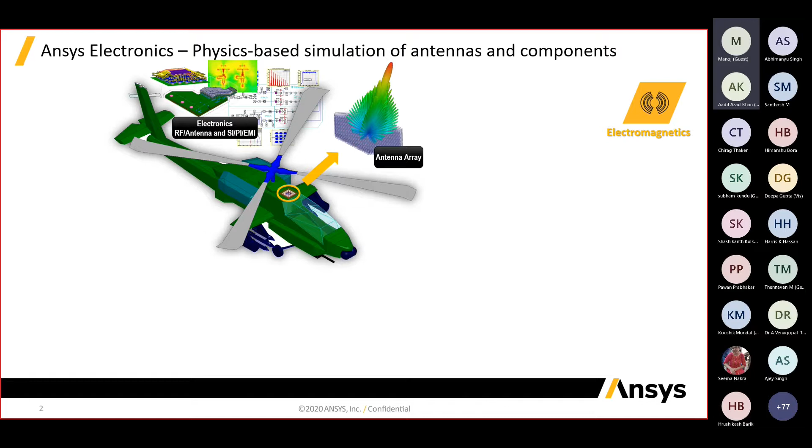Some people, especially for defense, need a high gain antenna. They use antenna arrays, multiple antennas, to get very high gain, so they can use it for long distance communication. Normally you will design this kind of antenna in a free space environment, but when you integrate this antenna on a mobile or laptop or any electronics gadget, because of nearby metals and other things, the shape is going to change.

Another application of electromagnetics is RF interference. That's called co-site analysis. What it means is, take your simple mobile, where Wi-Fi and Bluetooth are both working on the same frequency.

And very next to that, there is a GPS. Then next to that one, GSM bands are there, 5G bands are there. And these are all integrated within like a centimeter in space, and all are working in very nearby frequency bands. What can happen is when one is radiating, it can affect the performance of the other. So we need to analyze and see, if you have multiple RF systems on a device, whether it's going to work properly or not, right?

RF interference analysis. Another one, this is very interesting, is lightning. You might have seen so many videos where lightning is striking an aircraft and it is still flying without any problem. As per the calculation, every 4,000 flying hours, an aircraft can be hit by a lightning strike once. And that is very common, but they need to make sure that even though the lightning is happening, it should withstand it, right? If lightning happens and your entire engine shuts down, then all the passengers may die.

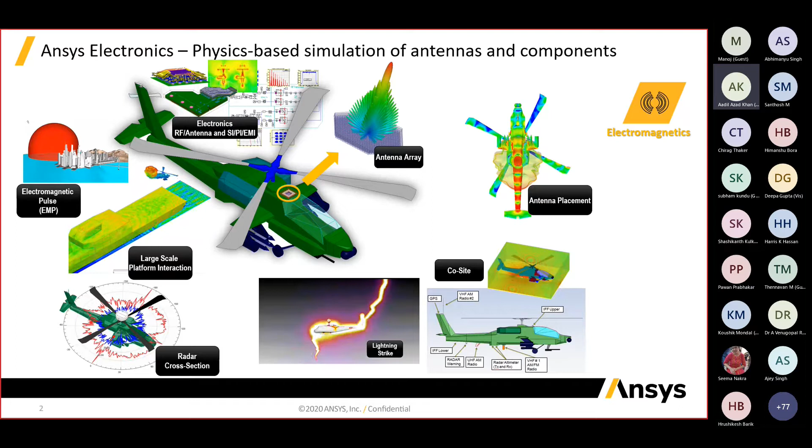So there are a lot of applications where electromagnetics are used, and where electromagnetic simulation software or computational methods can help you visualize or virtually model these scenarios and try to find solutions. Okay, so these are some of the applications where you can use computational methods. Coming to that, if somebody is asking, I want to do antenna simulations or communication simulations, the basic block will be the antenna, and this is a simple model.

As you do for any computational work, you will create a structure. These are all different antennas. You will excite each antenna with some excitation signal, you will set what frequency you want to simulate, and do a couple of material property assignments. That's what I need to do from a user point of view.

But we also need to understand how the electromagnetics are being solved behind the computational software. Without that, every electromagnetic solver, from my experience, is a black box. If you give good information, good input, it will give you good output. If you give garbage in, it will give you garbage out. So try to understand any simulation software you are using.

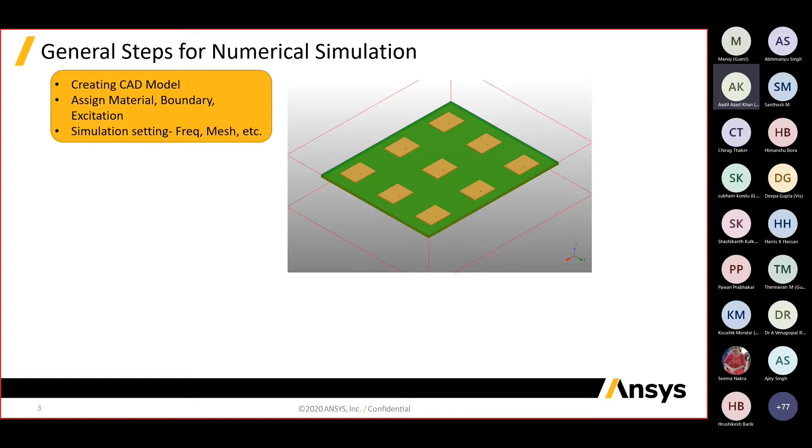Try to understand how it is actually working, at least the basics of that. So I'll try to explain the electromagnetic side. So this is what probably people will do. On the electromagnetic side, what simulation software does in the background is they just divide the entire structure into small meshes. And the electromagnetic equations, the fundamental four Maxwell equations, are solved on the mesh, not on the CAD.

Remember that one, because if you are properly modeling the structure, but your structure after meshing is looking like this, do you expect a right result from numerical simulation software? No. If you are creating any model, you need to make sure your geometry is going to be represented properly using a mesh. Okay, so selection of a mesh is very important.

And after this mesh, what happens is you will solve the electromagnetic equations. There are different methods. One is the integral equation method. Another one is differential equation methods. Then try to identify some of the unknowns. So the unknowns can be electric field, magnetic field, surface currents, and so on. If you can identify one of the quantities using the Maxwell equations, then all the other quantities you can recalculate using Maxwell equations.

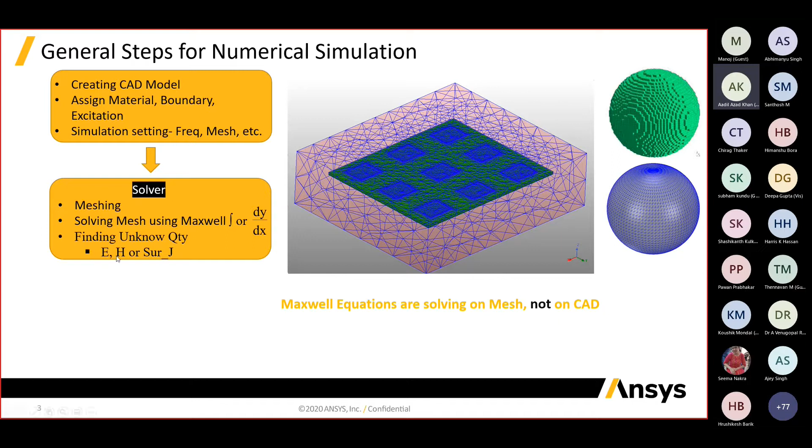So you have some excitation voltage or power, that is your input. You have the material properties, boundary condition, then they will try to identify the magnetic field, electric field or surface current. Now, from this electric field and magnetic field information, I can calculate at which frequency this antenna is going to work, what is the coupling from one antenna to another antenna, how the radiation patterns are coming up. These are all information I can calculate based on that.

Coming back, one step back, how will you identify whether the mesh is sufficient? So what is the calculation you will do if you want to solve some electromagnetic equations in a software? Do you need to take the mesh size as lambda by 5 or lambda by 10? Lambda is nothing but wavelength, right? So that's the one question. Is the mesh sufficient, or did I over mesh my structure?

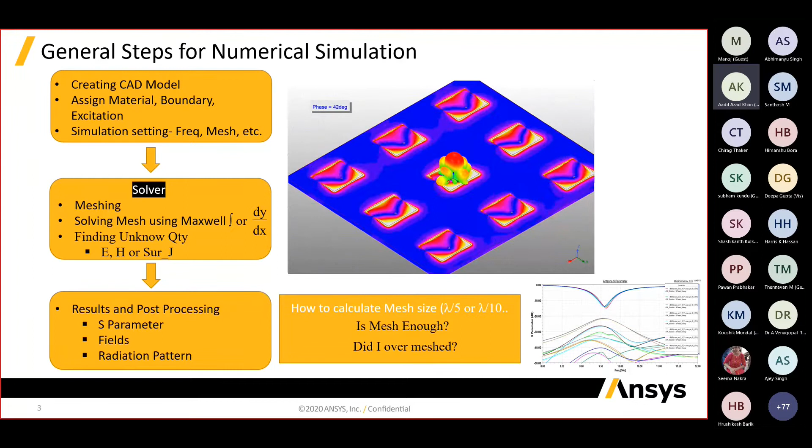You can over mesh the model, no problem. But the problem is you are going to end up with more simulation time, memory requirement, and so on. So there should be a compromise, or there should be an easy way to find the right mesh for your structure, right? So for that, Ansys introduced a technology called adaptive meshing. What it does in the background is a very simple idea.

You create your geometry and ask the solver to run it. So what the solver will do is create just an initial mesh and then try to see what the S parameter is or how the field is going to change. And then by default, it will improve the mesh. So you can see the initial mesh is very coarse. It tries to improve the mesh quality by adding more and more mesh. Every time it adds mesh, it will calculate how the response of my antenna is going to change.

If the response is not varying too much, what will happen? It will consider this mesh sufficient for better accuracy. If the S parameter is going to change a lot between my current mesh and previous mesh, it will keep updating till the S parameter converges. That's a good idea.

And one more thing you need to see over here is the mesh becomes denser and denser wherever the electric fields are very strong. But where the electric fields are not influencing your structure too much, you don't need to mesh that area very finely. So it does that calculation automatically for you. Okay, this is an example of how the electromagnetic solvers work and get accuracy, what is meant by convergence and so on.

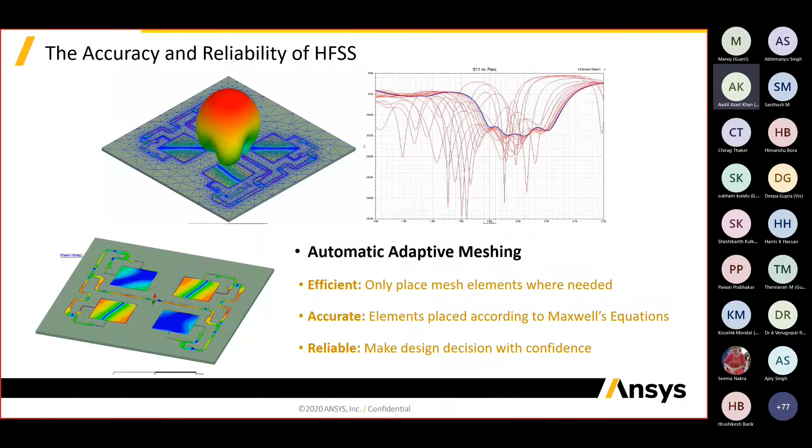Now, the second question is, I told you this simulation starts from the chip level, the PCB, and then you might be doing the antenna placement. The last simulation I simulated was a big city, right? So different requirements evolved, and there are a lot of challenges right now in front of us. Sometimes you need to simulate a very small piece of geometry. Sometimes you need to simulate a big city.

The electrical size of your problem is changing a lot with the different requirements. So one solver for the entire thing is not sufficient. So for that, different numerical methods have evolved, and most commercial software like HFSS adopted those numerical techniques and integrated them together.

If you go to bigger and bigger problems with the finite element method, it requires a lot of memory and simulation time. Another electromagnetic computation method is what people call method of moments, otherwise integral equation solver. It's solved predominantly on the mesh on the surface of the geometry. And since the unknown is surface current, no radiation boundaries are required. So you will have mesh only on the surface of the geometry. Because of that, you can solve metallic problems very easily, especially large reflector antennas.

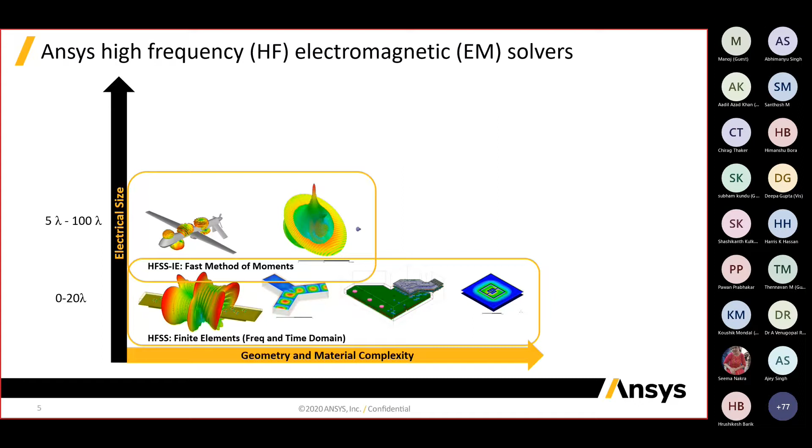Reflector antennas are very common nowadays. You have a DTH in your home, right? That DTH antenna you can assume as a reflector antenna. Then antenna placement on large metallic structures like aircraft, you can easily solve using method of moments. If the problem size is even bigger, something like a city,

then instead of solving the mesh, you will approximate the electromagnetic waves as propagating in terms of optical rays. So it depends on the material property. If it is a dielectric or metal, the field will reflect back or it can penetrate through. So that kind of approximation you can take when the electrical size is too big for you. Okay.

When it comes to practical problems, right, you will have a mix of these. What you can see is there is a big aircraft with very small antennas over here. So you can use a hybridization method. What it means is in a single geometry, different parts are solved with different solvers. So you can ask this antenna to be solved with a FEM solver and the remaining geometry with either MoM or the SBR technique. That's called hybridization of solvers. That significantly reduces memory consumption. Okay, so these are the solver techniques.

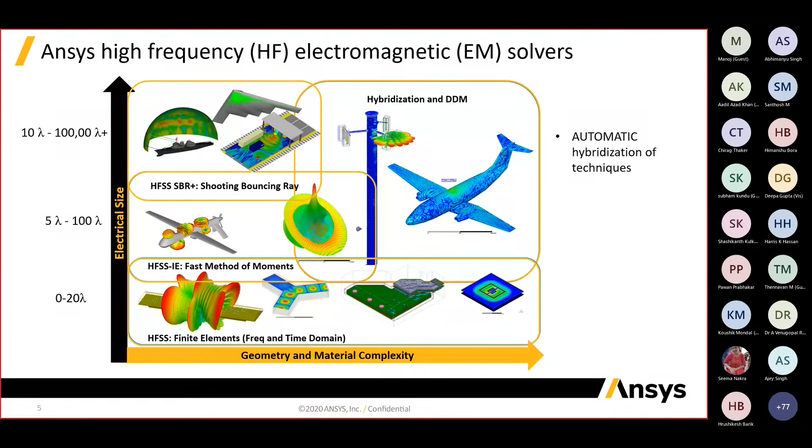Now it comes to breakthrough innovations in HFSS. What happened over the years on the development side? They started adaptive meshing in the 1990s. So it is almost a 30-year-old technology, but improved over the years by adding a lot of high performance techniques into it and improving the solver calculations. So the first thing is adaptive meshing.

Then they used multi-processing on the cores, then integration of the method of moments solver. Then they added array techniques, GPU calculation for FEM and SBR, then broadband meshing. The final one, which came in 2021, was mesh fusion. Mesh fusion is a new technology introduced this year. So we will check what mesh fusion is. Then we will go into a review of HPC.

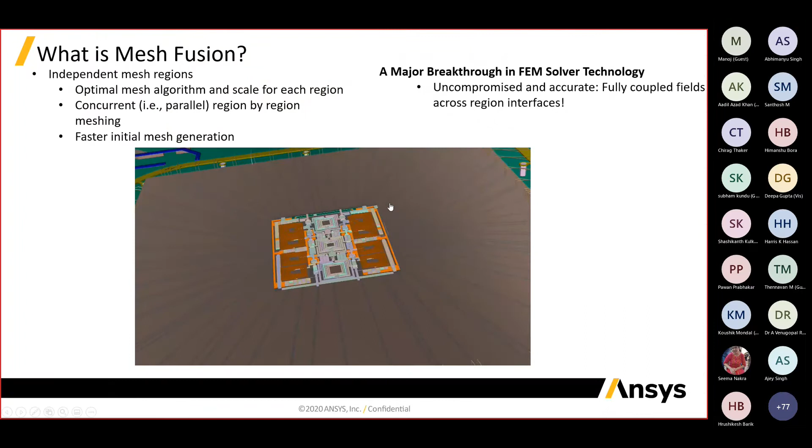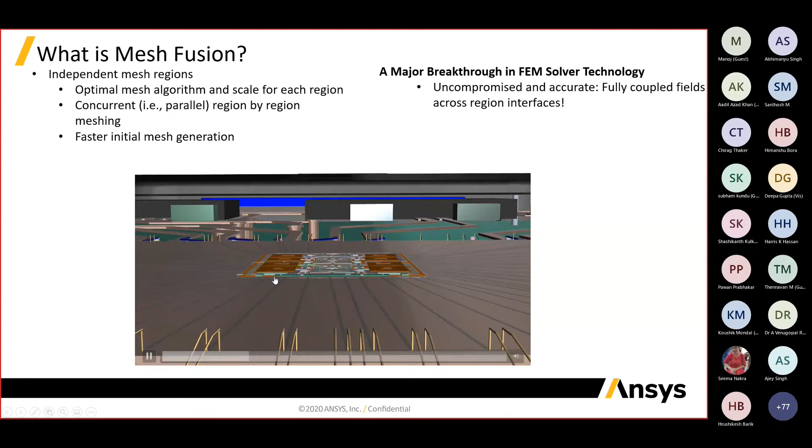Okay. So what is meant by mesh fusion? Just see this particular video. This is how the RF IC module will look. If you zoom into each section, you will see a lot of components in it. So this is an IC module. Then you can see the wire bonds. And this is the IC. Then you have a PCB over here. And if you go and see, there are some antennas over here.

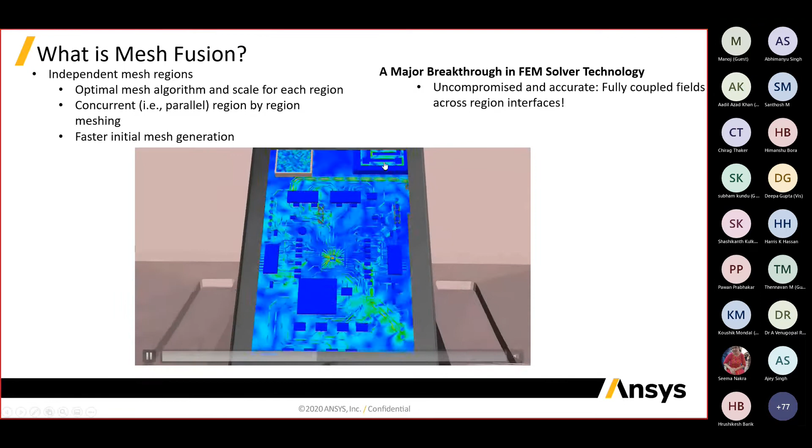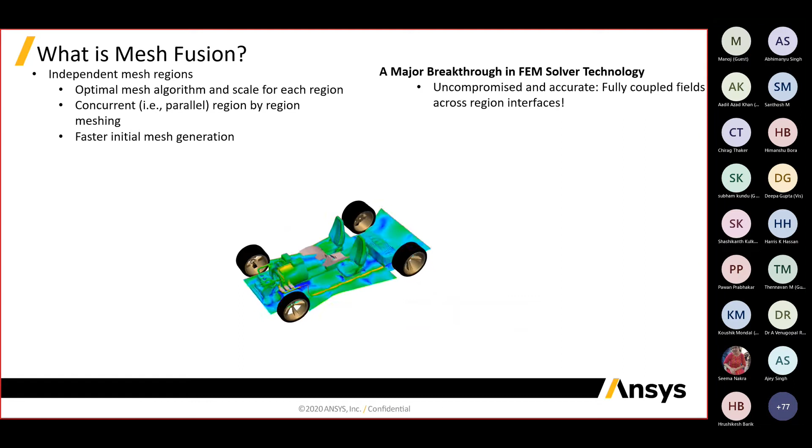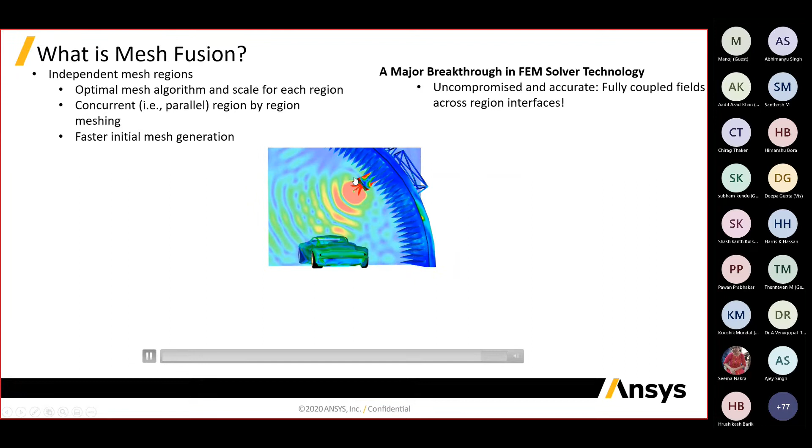This is a mobile which has a processor plus memory, which sits inside a vehicle. So you can see an electric vehicle model here. And this is the final model. This is an anechoic chamber where you can see a horn antenna radiating a high intensity field towards your vehicle, and you are doing radiated susceptibility electromagnetic analysis.

So what it shows you is you have a big problem, which is a big anechoic chamber with a horn antenna. Then there is a vehicle. Inside the vehicle, there is a mobile. Inside the mobile, there is a PCB. Inside the PCB, there is an IC, and there is a die over here, an RF die. So you are actually solving a problem which is on the order of meters. Inside this die, it will be on the order of micrometers to nanometers in size.

So you're solving this structure which is nanometers to meters in size. Meshing is totally difficult here. You can't preserve a mesh from micrometer size all the way to millimeter and meter size, and that is going to kill your mesher. So meshing is one big challenge for electromagnetic problems to get accurate results. If the mesher is not able to mesh your structure, then you can't even solve it. You need a mesh to solve it, right?

So this is mesh fusion. What it does is, whatever geometry you have, it meshes it independently. What I mean is your die will mesh independently, the IC plus PCB will mesh independently, your vehicle will mesh independently, your anechoic chamber and the rest of the geometry will mesh independently, and then it integrates these meshes together using a fusion algorithm. Okay, that's what mesh fusion does.

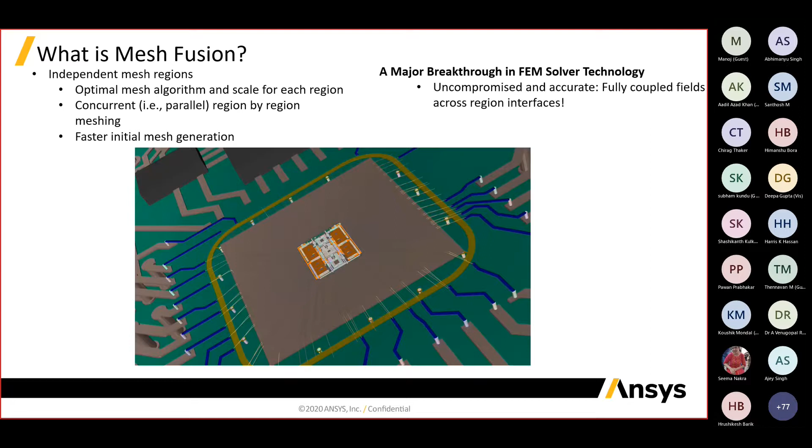So one example: I have a simple transmission line. There is an inductor here. When you do the mesh fusion, if I plot the mesh across this geometry, the mesh around the air and PCB is totally different compared to the mesh inside the component. This block is meshed independently and the outer boundary is meshed independently. So the meshes are discontinuous at that point. If the meshes are discontinuous, electromagnetically it is difficult to solve.

Mesh fusion not only meshes the component independently; when there is a discontinuity in the mesh, it properly takes the electric field propagation into account. So even though meshes are discontinuous, you can clearly see fields are continuous at the boundary of the mesh regions. So mesh fusion is not just independent meshing. On the electromagnetics calculation there were a lot of additional challenges they faced. They improved and corrected that. Now, from Ansys' point of view, there are not many challenges. Any problem, from nanometer to meter or nanometer to kilometer, you can solve right now.

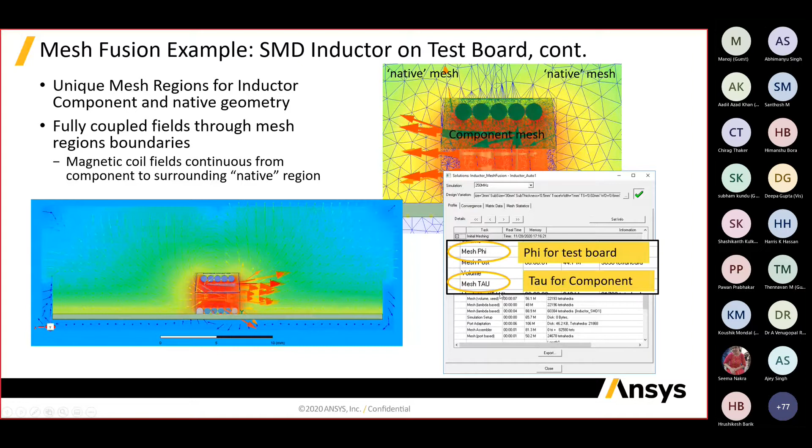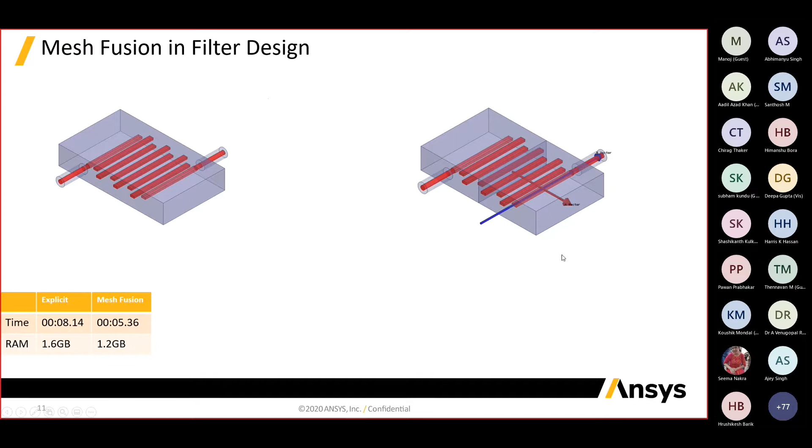So these are different types of meshing technology. In a simple simulation, different meshes are working in parallel and then solving it. This is a simple filter problem. I divided this into two problems, so this section meshes separately and this section meshes separately. When I plot the fields, you can see they are pretty much identical. S-parameters are the same. You can also see the memory and simulation time: memory reduced from 1.6 to 1.2, and 8 minutes of simulation reduced to 5 minutes 36 seconds. So you will see the improvement.

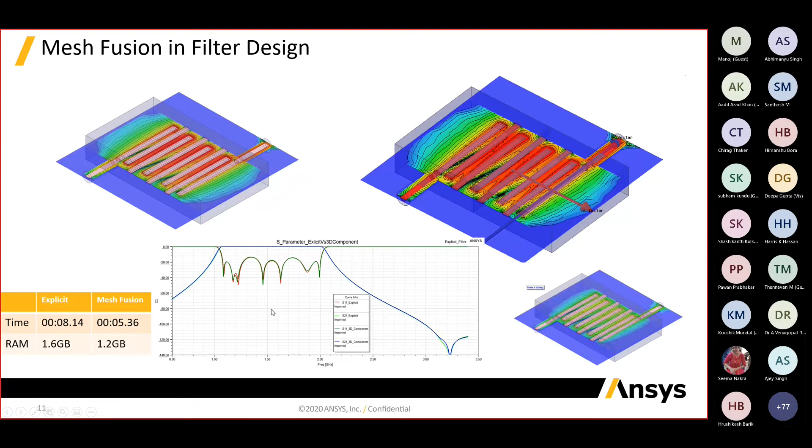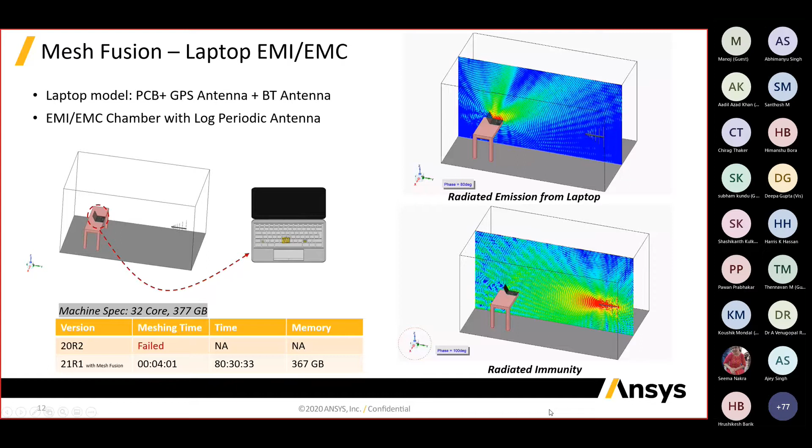Another one is called the electromagnetic EMI/EMC problem. You will have an antenna which receives the emission from your mobiles and laptops. It can also radiate and impinge some unwanted signal into the mobile. So there are analyses called electromagnetic emission and susceptibility. This is an example: a laptop with PCBs and a couple of antennas. It was not possible to simulate it in earlier versions because you have very small components and very big geometry. But with mesh fusion, meshing completed in just over 4 minutes, and the simulation still took 80 hours, more than 2 to 3 days, but it solved this problem. So there is no limitation. Now people can simulate huge problems with HFSS.

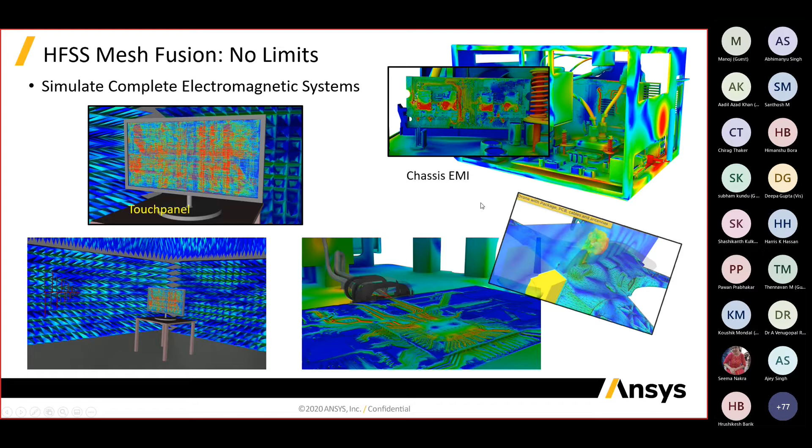This is a touch panel display. There are 300 micrometer level touch panel features inside it. It is able to solve that, including the anechoic chamber scenario. These are all different problems which earlier were not possible to simulate. Now it is possible to simulate with HFSS. This is what mesh fusion is about.

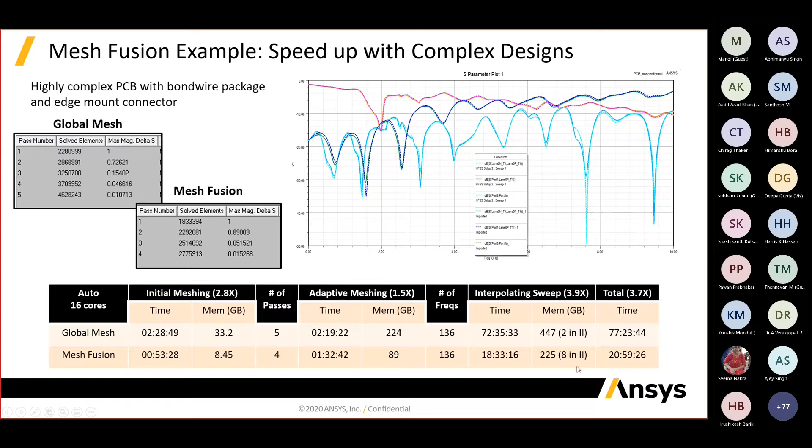It reduces the memory consumption for different processes in the computation. Okay, so we talked about some of the applications of electromagnetics and what is new, which came in 2021 from an electromagnetic computation point of view.

Then the second question is why we need high performance computation. In the 1990s, HFSS started most of their code, in 1990. At that time, a 10K matrix size. This is nothing but a waveguide with a coaxial adapter, and that is only half portion of it. The total matrix size is 10K, and it took 10 hours plus at that time on a machine to simulate it.

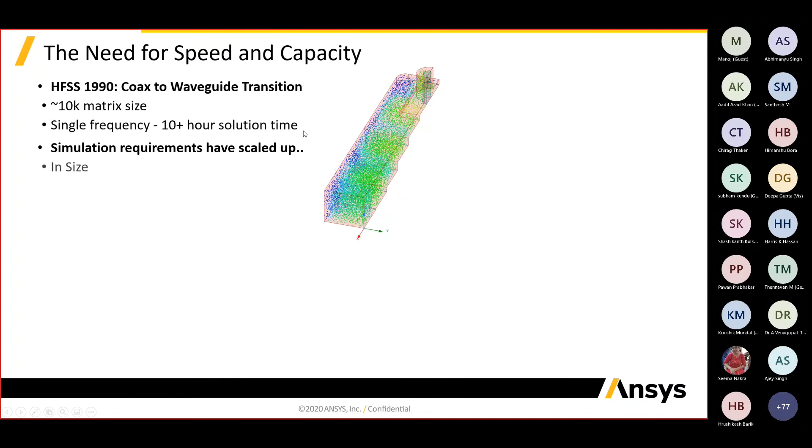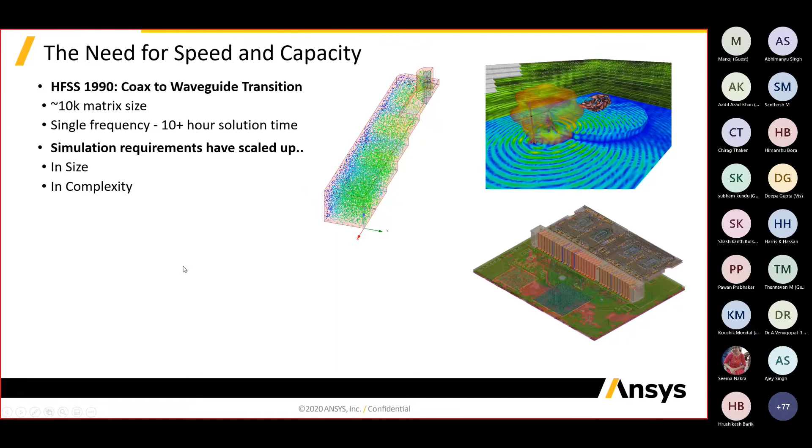Simulation requirements have now scaled up to, let's say, a big vehicle with antennas and big anechoic chambers. It became very complex nowadays. You can see the PCBs with the connectors and a memory module over here. Assume a computer motherboard PCB; those are like 24 to 36 layer PCBs. So the PCB with the connector and a memory module, that kind of complexity people are now trying to solve.

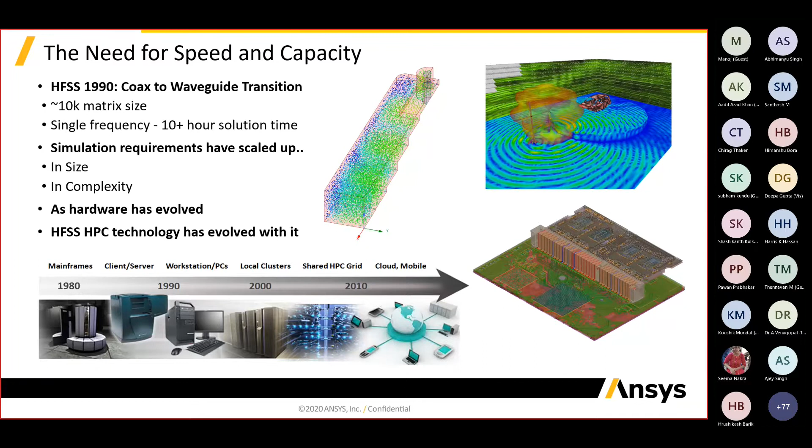Another one is hardware evolution. Earlier machines were very bulky and very slow in computation. Now with the 10th generation, 11th generation processors, a huge speed up came on the hardware side. In my study time, floppy disks were very common. That 1.4 MB of memory was sufficient for copying files here and there. Now we have SSDs with 256 GBs. That's the kind of hardware change that happened over the years.

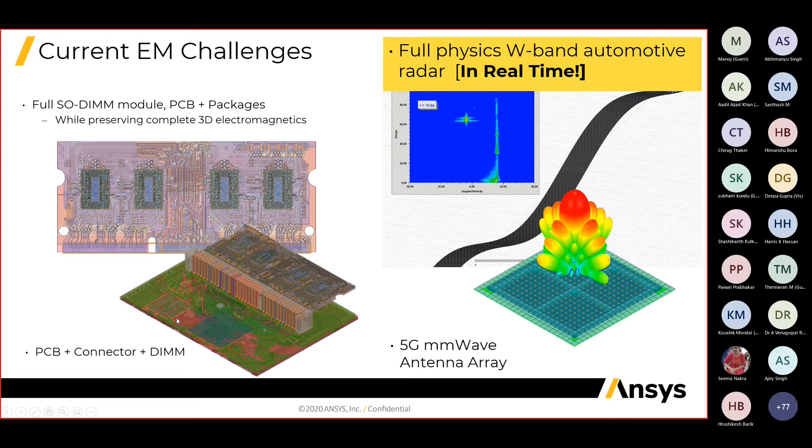Coming into current challenges, a couple of challenges are, as I mentioned, the PCB with the connectors and the memory modules. Another example is 5G. 5G requires huge MIMO antenna arrays. And you might have seen automotive radars, how vehicles moving over the road detect targets. So automotive radar is another big EM challenge in front of us.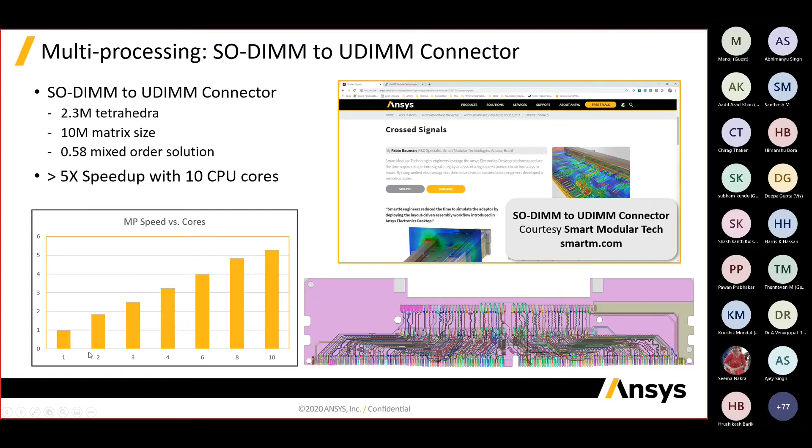This particular PCB, you can see this speed up over here. If you change from 1 core to 10 cores, you are almost going to achieve a 5x kind of speed up. Okay, so the speed up is not purely linear. At some point it's going to straighten out, but the speed up increases over the cores. Okay, so one way is to use multiple cores in your CPUs.

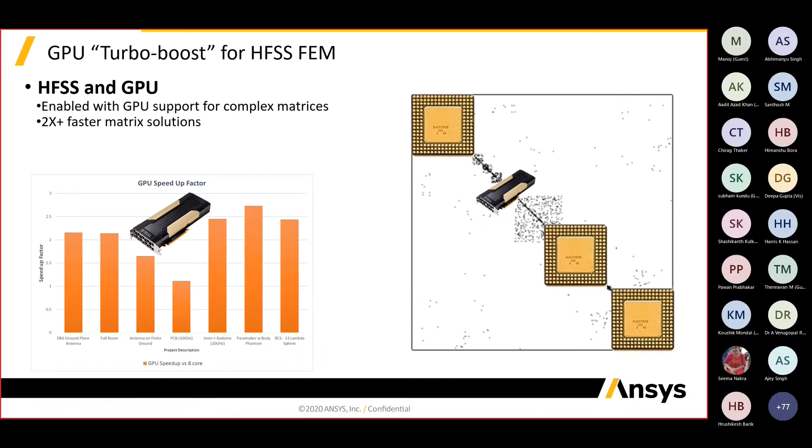Another one is you can speed up the simulation using GPU. So FEM solvers now support GPU. One solver, called the direct matrix solver, supports GPU. You can see the scale up is up to 2x. In some cases you can see more than 2.7x using the GPU computations. So what they integrated is, along with this matrix calculation, they added GPU support. So some of the complex matrix calculations the GPU can now perform and speed up the simulation.

Another one is, most of the time when you see these complex simulations, one machine may not be sufficient to simulate this kind of problem. So what you can do is distribute the memory across multiple machines. So I have one machine with 64 GB. Then I use multiples of 64 GB and connect the machines using a good high speed network cable. It can be a 100 Gbps or faster LAN cable, or it can be InfiniBand kind of cables. Because a huge amount of data is going to be shared between different machines, you need high speed connectivity between the machines. Okay, so that's another way.

So you can see an example, a complete vehicle body with an antenna and a human body model, and this was solved with 6 machines of 128 GB in under 3 hours. This took a total of 714 GB of memory, and it was able to solve the complete problem. This was done in 2014. So in 2014 itself, they implemented this technology to distribute the simulation across multiple machines and solve it.

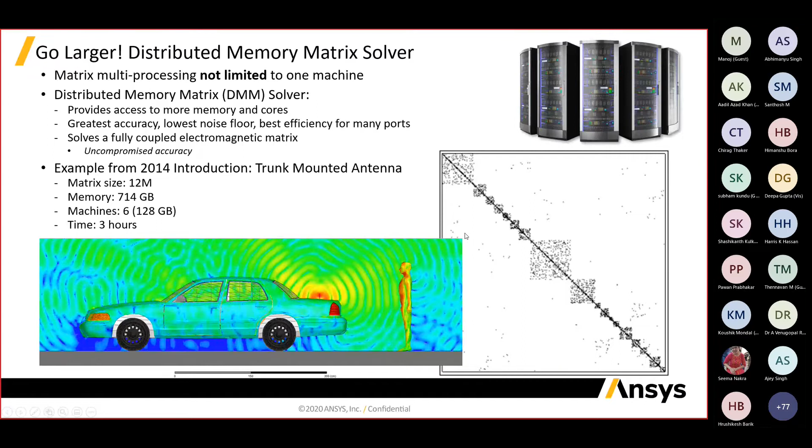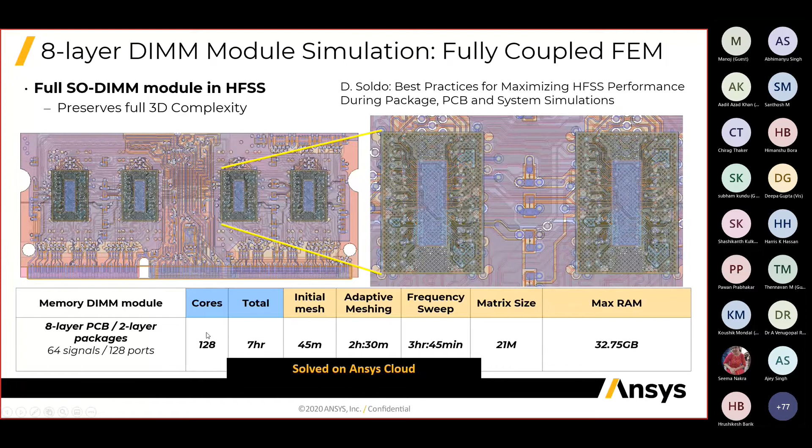And when it comes to complexity, the complexity is going to be huge for big problems like PCB, die, processor, RFICs, and other things. Here you can see this complete PCB was simulated. It's an 8-layer PCB with 64 high-speed signal lines from memory all the way to the processor. They used 128 cores. Total simulation time is 7 hours, with 21 million unknowns. Each machine took 32.75 GB. In the next one, you can see the total memory used was 262 GB, and there were 8 machines, so one machine was using 32.75 GB.

So this was a complete S-parameter between the memory module and the connector side, the DDR memories. Okay, so as I mentioned, one way is you can speed up the simulation using multiple cores in your CPU. Another one is, if you have multiple machines, you can distribute across multiple machines. If you have a GPU in your machine, further speed up is possible by using that GPU in the computation.

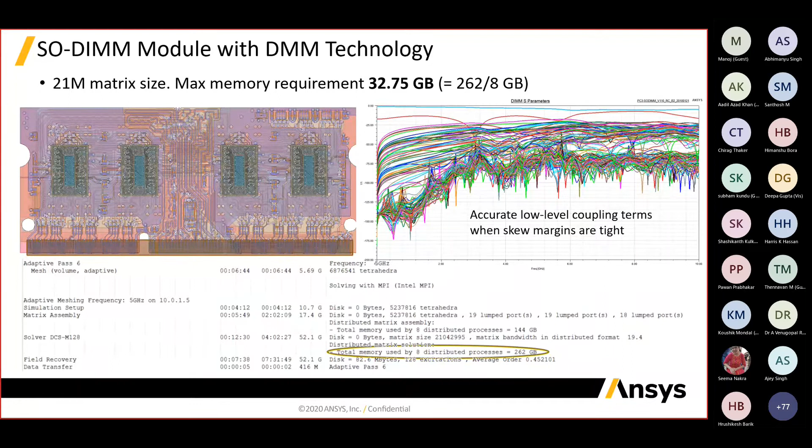Another one: the simulation process involves meshing, then solving and finding the right mesh for your structure using adaptive meshing. Then you need to solve for a frequency band. So another kind of HPC is called the spectral decomposition method. Let's say I want to simulate this PCB with a connector or IC package from 0 Hz all the way to 20 gigahertz. I can distribute multiple frequencies to multiple machines.

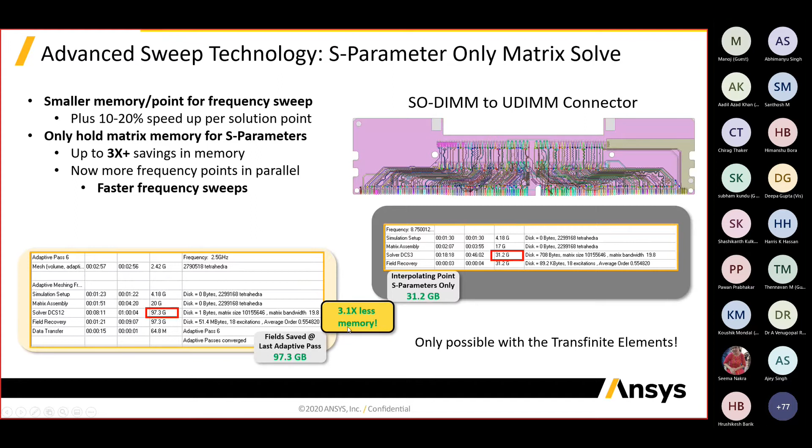So these are some of the examples. Another one is, you may be interested to see the field, but in 90% of PCB analysis and other things, people would like to see the S parameter. So if you are okay with S parameter, there is a significant speed up they added on the S parameter extraction. If you want to solve the field also, the memory requirement was 97.3 GB. But when it comes to only S parameter, that memory reduced to 31.2 GB, which reduces the memory requirement by 3.1x. And simulation time also improves a lot.

I'll show you that example here. You can see the same example model with the field and without field. The field is nothing but the electromagnetic field, if you want to visualize it; that is the simulation on the left side. If you are not looking for the field, only the S parameter, then you can see the simulation time without it.

This is with the field. There is a correction here. This is with the field. It was taking 8 hours 33 minutes. Without field, you can see it simulated in just under 4 hours. So almost half the time, and speed up is about 2x. So that is another option of using HPC. HPCs are leveraged in different ways: cores, memory, different machines, and solving different frequencies in parallel.

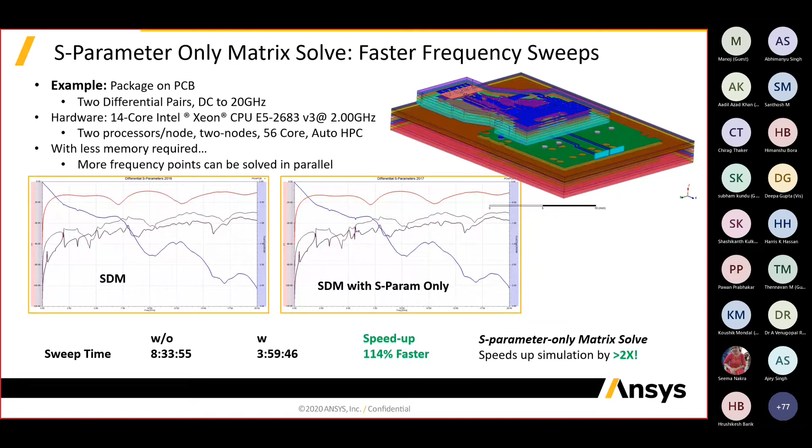Another method is the decomposition method. I'll explain the decomposition side. Let's say I have a big problem, a big aircraft, I want to simulate. Instead of solving this problem on a single machine, I will distribute it to different machines. Different structures or different regions will be distributed to different machines. Then one machine will control the entire process. That's called the domain decomposition method.

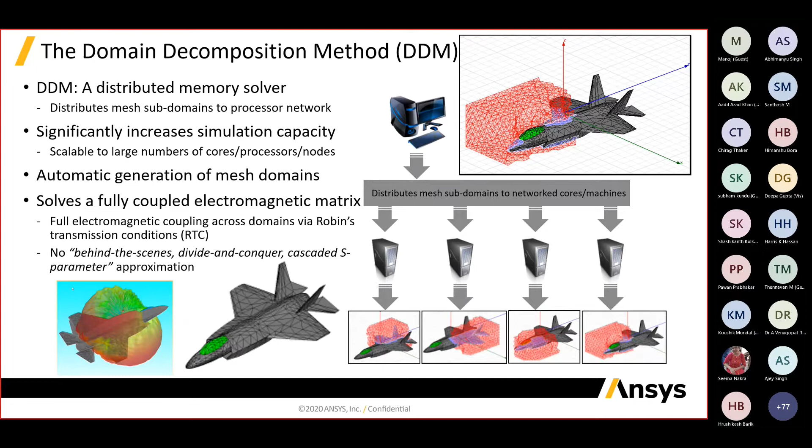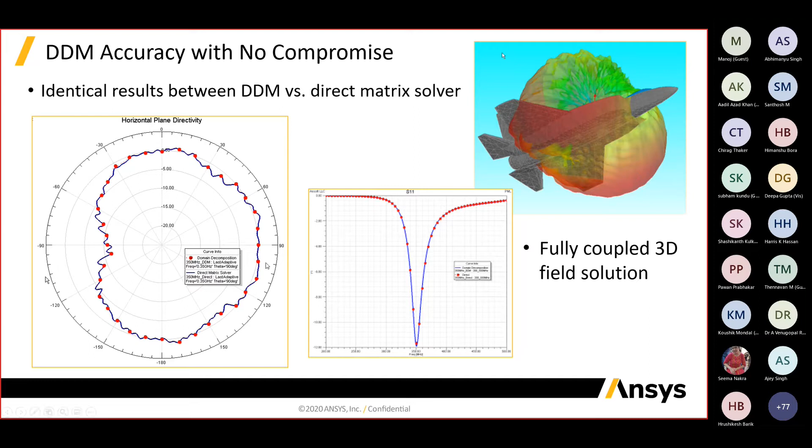So the entire problem will be divided across different machines. Earlier, only memory was divided, but here the process itself is divided. And you can see the comparison between normal simulation and domain decomposition simulation. Results are validated against many different models, and we found this method is another way of improving the simulation time.

Another one is hybridization. As I told you, you can ask HFSS to use different solvers for different geometry. The unknown that the FEM solver calculates is the electric field, but for the integral equation, the surface current is the solution. So you don't need any radiation boundary for that.

So if you integrate FEM and IE hybridization, over here you can see 137 GB of memory and 2 hours 16 minutes of simulation time. Now that reduces to just under 5 GB of memory and 6 minutes. 23x speed up in the computation, 27x reduction in the memory.

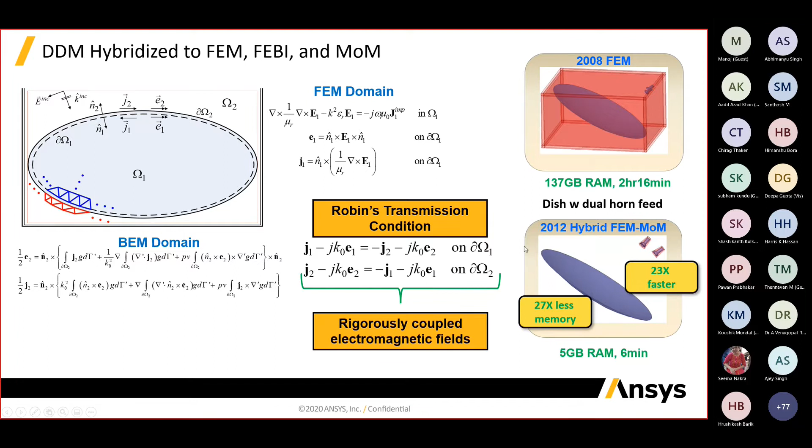What it does is FEM calculates the electric field, and then on the surface of this radiation boundary, it calculates the surface current due to the electric field. Once it calculates the surface current, the entire problem becomes method of moments. And for large metallic areas, method of moments works pretty nicely. So that's the idea of the entire method.

And the domain decomposition method is now available for antenna arrays also. For antenna array problems, we now use the domain decomposition method for large antenna array elements, and this can also use the HPC technology I mentioned, across different cores and different machines, to solve it.

One example is a big 256 element 5G MIMO antenna array at 28 gigahertz, which consists of 4 subarrays. This is a 64 element subarray, this is another 64 element subarray, and this was solved on a 128 core setup, around 4 machines of 32 cores, in just under 2 hours. You can see this complete simulation, including the radome, antenna array, and the ground plane.

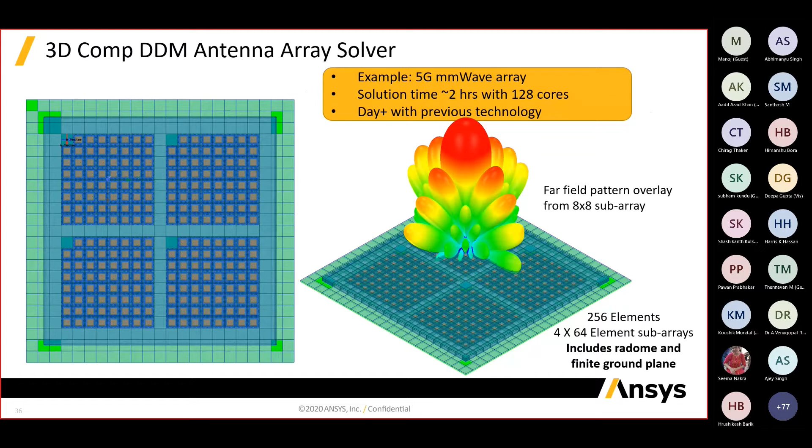Next, so far we discussed PCB, IC, antenna, then a little bit of automotive. But now let's talk about radar simulations. HFSS is capable of simulating automotive radars or defense radars, which can work in FMCW or pulse radar methods. When it comes to a simple radar, let's take an automotive example.

Nowadays you might have seen Mahindra launched a level 2 autonomous vehicle, which has a camera over here and a radar over here. It will look something similar to this. When you zoom in, you can see an area like this. In Mahindra, it is somewhere here. They were using Mando radar for automotive.

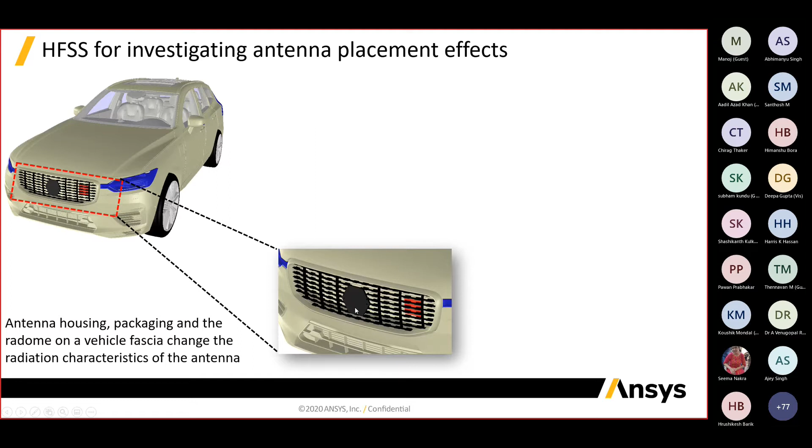This is actually, I took the video from YouTube. The people have actually simulated, measured the radar response. You can see the radar, the target is also detected. Here you can see the reflections or rotation of Doppler because of the tires. So these tires are in front and back tires. So you'll clearly see the reflection which is coming from the tire here. This is called micro Doppler effect.

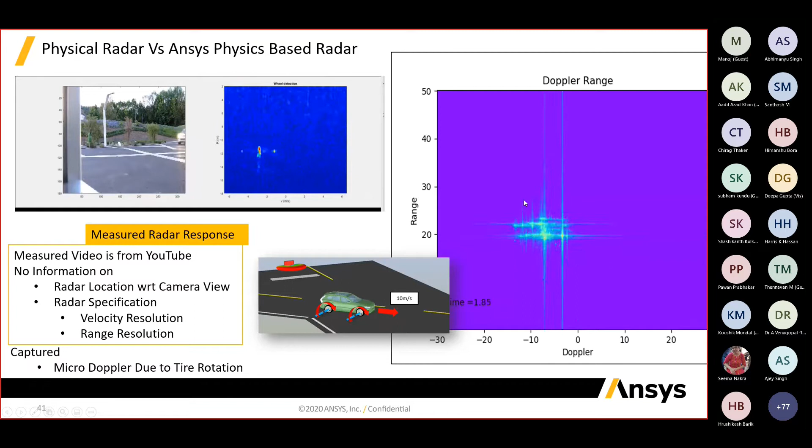We also simulated same scenario in HFSS. Here also you can see the front tire and back tire micro Doppler effect. So HFSS radar simulations are well validated against measurement. I have so many other validations and they use this kind of a technology, shooting and bouncing ray technology, in order to solve these automotive radar problems. This is now we are using for a little bit of defense application also.

Over here you can see example where let's assume I have a radar antenna. There are two vehicles. If you see these simulations, how it is solving, that's what I am trying to explain here. If you have an antenna, it actually shoots a lot of rays and depending on the material property of the medium, rays will reflect. And if it is reflecting on the road, some part of the signals can still propagate even though there is no line of sight between these two vehicles.

If you see from this point, because of multipath, it can propagate to the non-line of sight area also. Okay, so total number of reflections will be there. After the reflections, there can be some rays which can penetrate through the dielectric material. So from here, the ray can directly go and hit on the glass body. There can be some rays hit on this road and then go and hit on the glass body. It can propagate through this inside medium and hit on the vehicle which is in front of it.

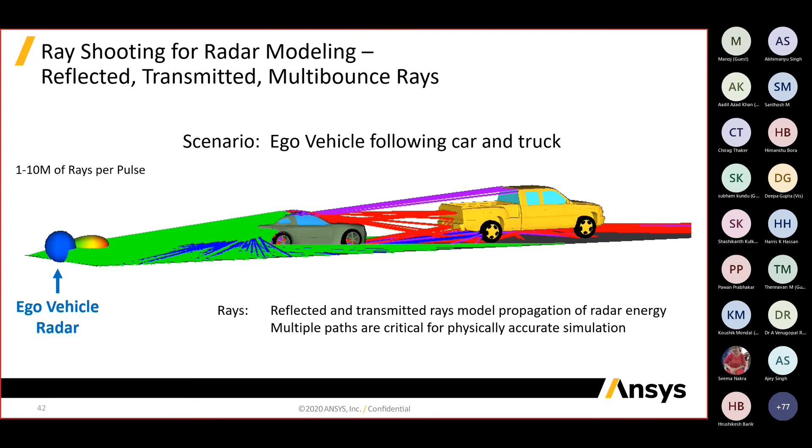So the total simulation for this one, actually it's going to send about 1 to 10 millions of rays per pulse of radars. So you need to have hundreds of radar pulses in order to get a single frame of range Doppler velocity. So it's a combination of both transmitted and reflected rays. And this is what is happening when you actually move your vehicles in front of the radar, right?

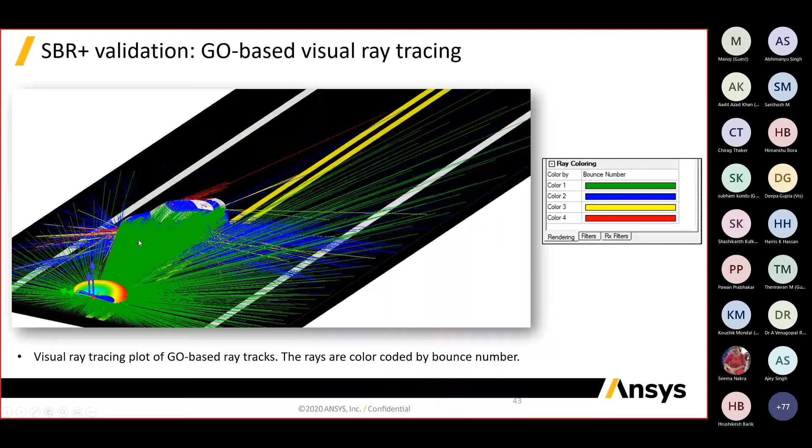So many number. This is actually filtered because if you allow to render all 10 millions or 1 millions of rays, the graphics will hang. So we reduce the number of rays in the visualization process just to show you how the electromagnetic pulse is going to interact with the ray tracing method. So this is what is happening in the background.

Then if you want to see the time domain analysis, we can convert this near field data from the frequency domain into time domain, and you can visualize how the electromagnetic wave is going to propagate from the vehicle, how it is going to reflect based on the geometry which is in front of the radar.

And this radar signal is actually coming back. So this is what is happening in radar, which will detect the range and velocity. When the electromagnetic wave is propagating, the wave which is propagated depends on the material property. Some energy will be reflecting back. That's what it calculates. Okay.

So when it comes to a large scenario, this is a big city scenario. In 2019, if you wanted to simulate this scenario, it was taking about 14 hours of simulation time. So that was the computation required for HFSS in 2019. Then what they did is they created an algorithm. It's called accelerated Doppler processing algorithm, which reduces this computation time to less than 5 minutes.

Then they created one more algorithm. It's called fast frequency looping method. They improved the simulation again to less than 1 minute. So by 2020, 14 hours was reduced just by algorithm developments, the solver improvement, you can say. So almost like a 1000x speed up by just algorithm.

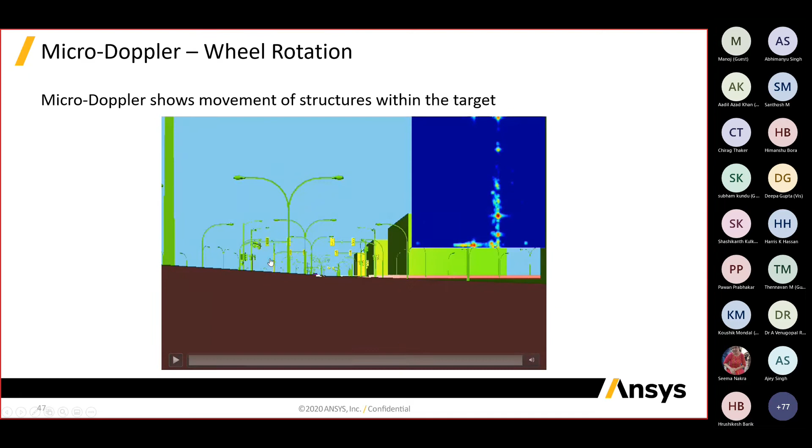So this is another example where you will see the micro Doppler effect. Micro Doppler is another effect in radars which can detect rotation, of the tires and other things. So you can see the micro Doppler effect detected by the automotive vehicles. This is another object detection from the real-time radar. You will be able to see how the vehicle is propagating, where the targets are reflecting back, and how the range and velocity plot will look when this vehicle is moving around. So this kind of speed up they developed using this particular algorithm.

So as a conclusion, multiple antennas will be there in a single radar. It extracts this frequency pulse information for different channels. It can be used for detecting the range of a target. It can detect the angle of arrival of a target. It can be used for ISAR imaging, imaging of terrains and other things, and different other applications.

Okay, so the current capability is a 15 channel radar. You can simulate at 30 frames per second with real-time capability. When it comes to 110 channel radars, right now the speed is 4.4 frames per second, meaning close to 4 to 5 frames you can generate if you have 110 channel radars. So that's the capability of current HPC in electromagnetics.

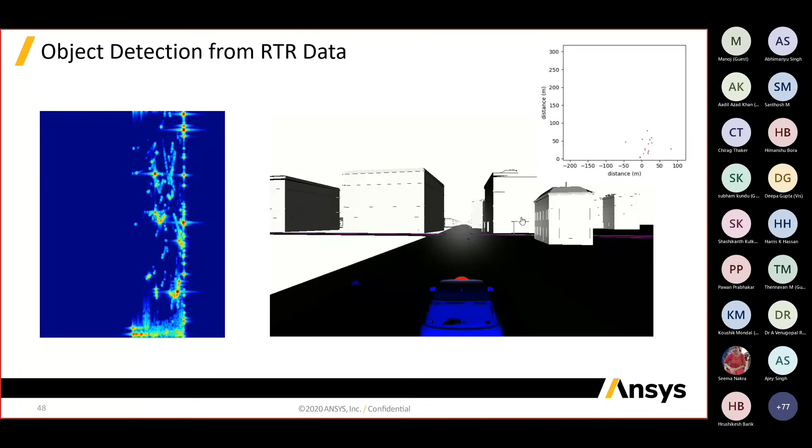So if I go a step back, this contains a road with multiple vehicles, and if I go back here, this is with the multiple radars on a vehicle with so many street lights, multiple vehicles, buildings and other things. It can still create frames every 17 milliseconds. Okay, so that kind of a speed up.

And this is not right now integrated with HFSS. Why? Because the HFSS graphics user interface is not designed for taking this kind of complex rendering. So this is the same solver integrated. It can be integrated to any platform. It is integrated with the Carla automotive radar simulator. It is integrated with the Ansys VRX virtual reality

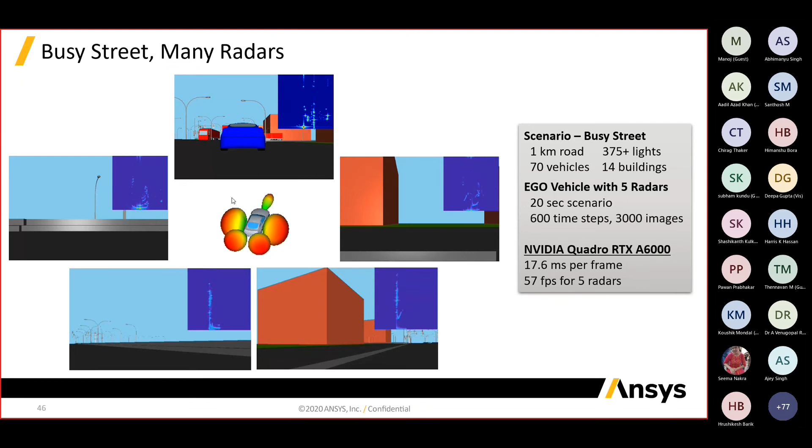graphics engine. I think in today's second half you will have a talk on that. So the same HFSS solver is integrated inside this particular tool to get a feel of the graphics movement, but the computation is the same as in HFSS.

Now what you have in HFSS is this 14-hour simulation. Now you can simulate it in less than 1 minute. That capability current HFSS has. If you have this scenario, I have so many models which are now available in the next year. It is in the open examples. You will have a lot of examples which can simulate and create this kind of a frame in less than 1 minute.